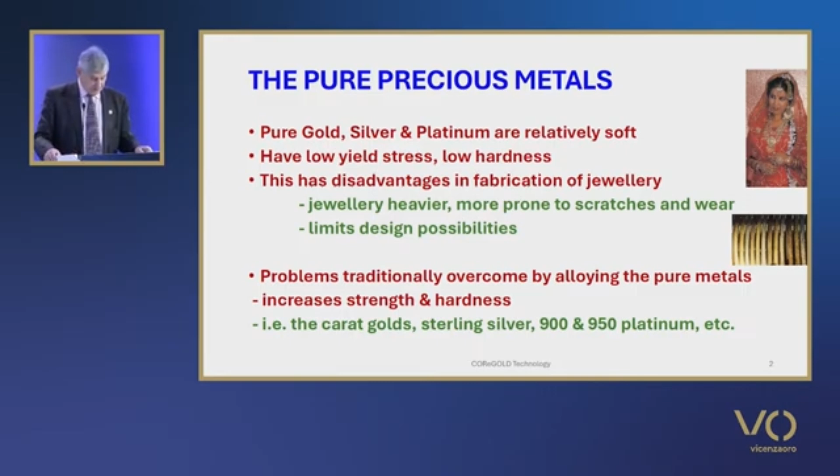However, for gold, especially 24-karat gold of purity greater than 99.0%, is the alloy of choice in the Far East, where it is known as Chuk Kam, meaning pure gold, and in the largest market, India and its subcontinent, 22-karat gold jewellery dominates.

These two markets account for around 40% of total jewellery fabrication, and the relative softness of both 22 and 24-karat gold is seen as a weakness. The development of stronger 22 and 24-karat golds has long been desired.

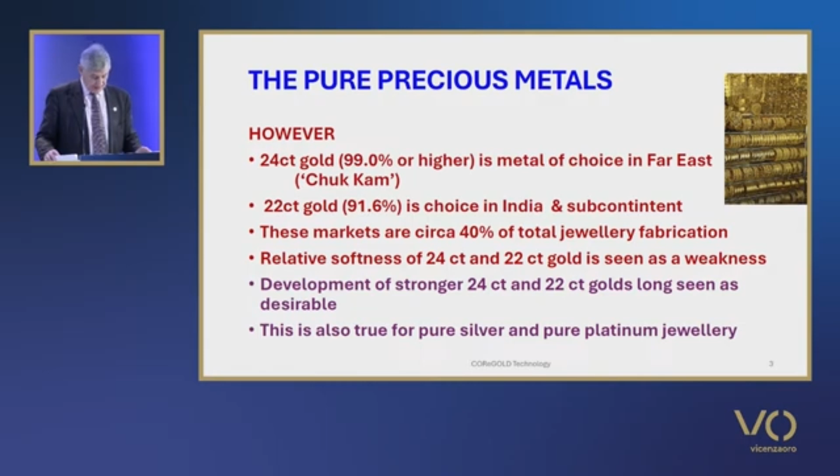For gold, the development of 990 gold, that's a 99% gold, 1% titanium alloy, in the late 1980s, hallmarkable as 24-karat, overcame many of the deficiencies of 24-karat gold with good strength and hardness. But it has not met with much commercial success for several reasons.

In recent years, however, there have been a number of hardened or improved strength 24-karat gold materials developed with finenesses of 99.5% or higher, some in commercial production, where improved hardness and strength have been achieved by micro-alloying, i.e. the addition of very small amounts, typically 0.3%, of certain metals, and these are attaining some limited penetration of the market.

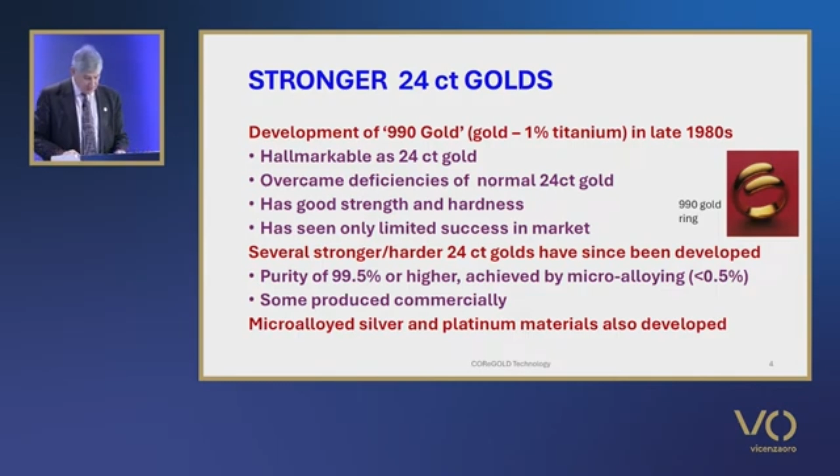Microalloyed silver and platinum materials with increased strength and hardness have also been developed and are being commercialised. Until relatively recently, little information was published on such microalloyed precious metals, and that was mainly in patents, and there was little understanding of the metallurgical basis for such materials.

The work on microalloyed gold was reviewed by myself at the 1999 Santa Fe Symposium and attempted to explain the theoretical basis for the microalloying of gold. Since then, further information has been published and interest in microalloyed silver and platinum has emerged.

Furthermore, interest in hardening high fineness gold, carat golds, has been of interest. This topic was reviewed by the author at the Jewellery Technology Forum in 2005, but more research and information of relevance has since been published. Thus, some 10 years later, it is perhaps an appropriate time to update progress and knowledge.

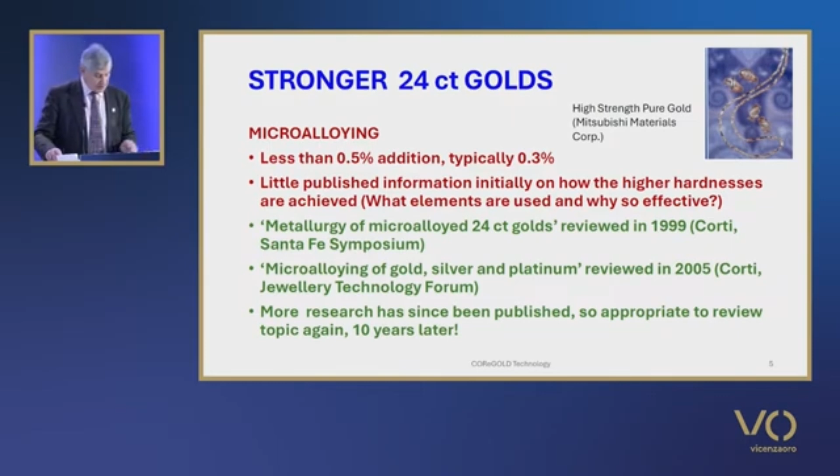This presentation initially focuses on the mechanisms of strengthening metals and then reviews recent developments by conventional alloying of pure precious metals, and then on microalloying of gold, and covers the following aspects.

The microalloyed golds that have been developed in terms of their properties in comparison to those of conventional carat golds. The metallurgy, the theoretical basis for hardening, and possible candidate alloying elements which could form the basis of microalloyed 24 karat golds. And published information on the compositions and practical aspects of jewellery manufacture in actual microalloyed 24 karat golds.

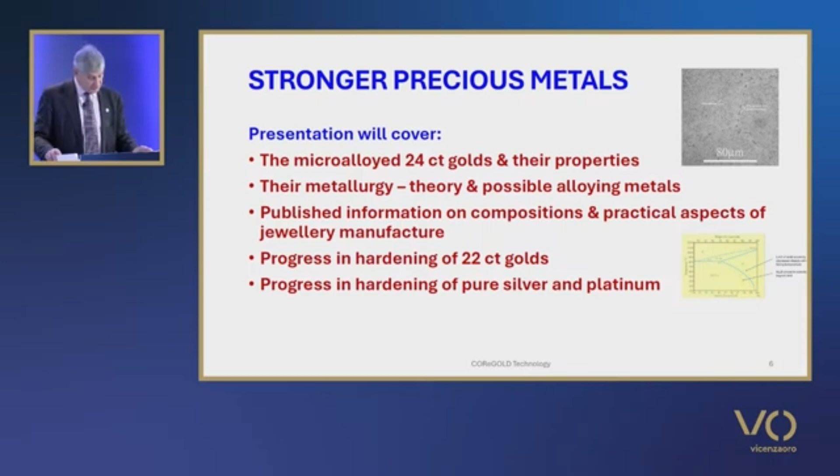Progress in hardening of 22 karat and other high karat golds, as well as platinum and silver, is also discussed. The advantages and disadvantages of such materials for jewellery application are considered.

We look at the mechanisms of strengthening pure metals by alloying, as well as work hardening by deformation. There are essentially three basic mechanisms of strengthening or hardening pure metals through additions of alloying elements: solid solubility hardening, dispersion hardening by second phases, and grain refinement.

Solid solubility hardening: in hardening by solid solubility, alloying additions dissolve in the pure metal. That is, they are incorporated into the crystal lattice of the pure metal, and this results in the distortion of the crystal lattice, making dislocation slip more difficult. That means it requires more force to deform the metal.

The degree of hardening depends on the relative difference in atom size of the pure metal and the alloying metal, as well as the amount that you add. Thus, in carat golds, it is well known that copper is more effective than silver in hardening gold, as its atom is about 13% smaller compared to silver, which is only slightly larger than the gold atom.

In dispersion hardening by second phases, when a second phase is dispersed in the metal, it will cause some hardening. Alloys that form eutectics in their microstructure, such as the silver-copper alloys, are good examples here. However, if the second phase is present as very small particles dispersed within the grains or crystals of the parent phase, these impede the movement of dislocations during deformation and cause considerable hardening.

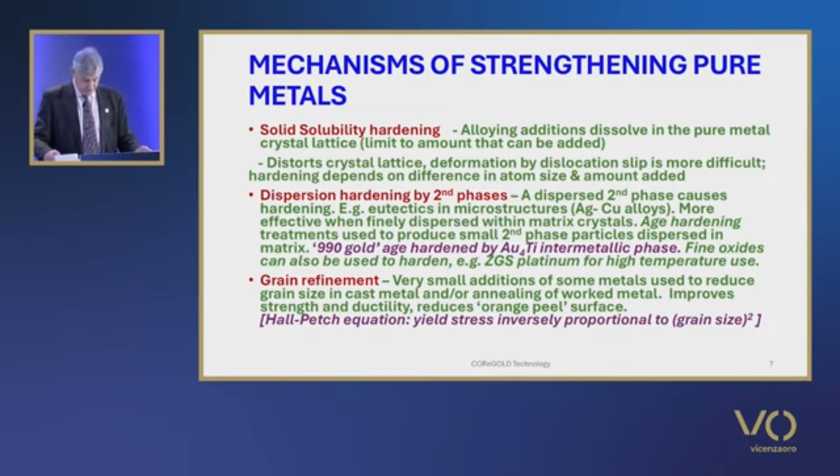If we look at conventional alloying, here we're talking of adding alloying metals in amounts of at least 0.5% or more. The addition of 1% titanium to pure gold to produce 990 gold has been referred to previously. Other significant improvements to 24 and 22 karat golds have been described using conventional alloying approaches.

Du Toit and co-workers at Mintek in South Africa showed that a 995 fineness 24 karat gold containing 0.3% antimony and 0.2% cobalt can be age hardened to a hardness of 132 to 142 Vickers, depending on aging temperature, as shown in the table. And we can argue whether this is conventional or micro alloying. My feeling is it's probably the latter.

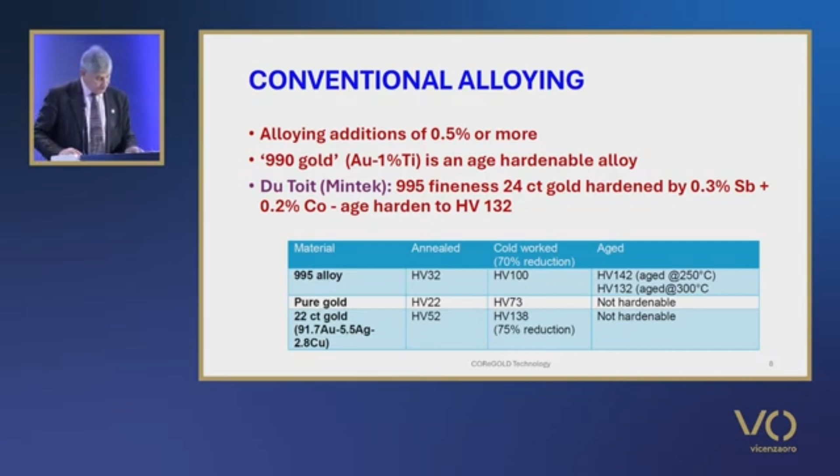Fischer-Bühner, when he was at FEM, has demonstrated the use of circa 2% to 2.5% cobalt additions to effect significant strengthening of 22 karat gold with aged hardnesses of 200 to 260 Vickers, although this involved a relatively high solution annealing temperature of 900 degrees Celsius.

And he also showed that a combination of cobalt and antimony, in total 1%, resulted in a hardness of circa 150 Vickers after aging, but using a lower solution temperature of 700 degrees.

There is also a patent by Taylor, who patented a 0.4% cobalt containing 22 karat gold, silver, copper alloy, but with a small addition of boron included. And this attains a hardness of 134 after 60% cold work. It is not clear what improvement in properties has been achieved over normal 22 karat gold compositions.

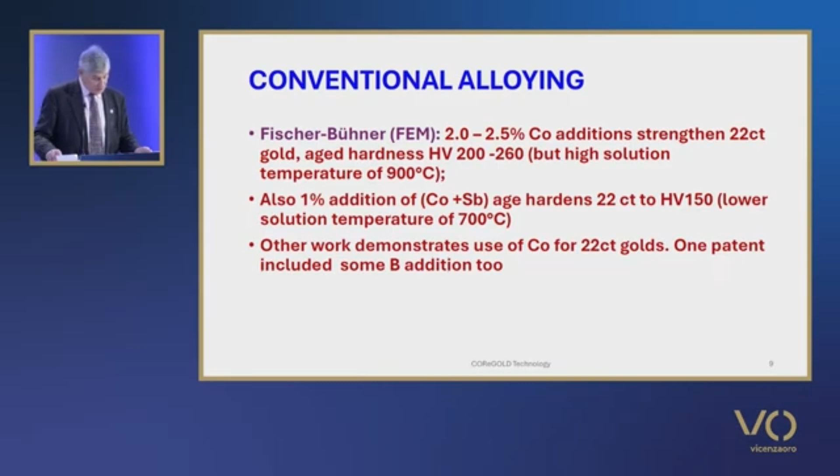We now move to microalloying of gold. I'm going to repeat a lot of what I've said in my earlier review in 2005. But before I start, I just want to say something about the density effect when you're alloying.

We must distinguish between the difference between the atom weight and the atom volume in an alloy. The higher atomic numbered metals are heavier and denser. Gold is a heavy metal with a density of 19.32, where silver has a density of only 10.5 and copper a density of only 8.93.

Thus, in describing alloy compositions, we must differentiate compositions given in terms of weight percent and atomic percent. Weight percent: the relative weights of alloying metals present. And atomic percent: how many atoms there are of each metal in the alloy. This difference is illustrated with gold-copper alloys.

An alloy of 50 atomic percent gold atoms and 50 atomic percent copper atoms, that is 1 gold atom to 1 copper atom, has a weight composition of about 75% gold, 25% copper. And that reflects the difference in the weight of the gold and copper atoms.

We look at the theoretical basis for microalloying. In the development of improved strength 24 karat golds, we're looking at total alloying additions of 0.5% or less, typically 0.3%, and even down to only 0.1% in some instances. This affects a dramatic strengthening of the gold crystal lattice.

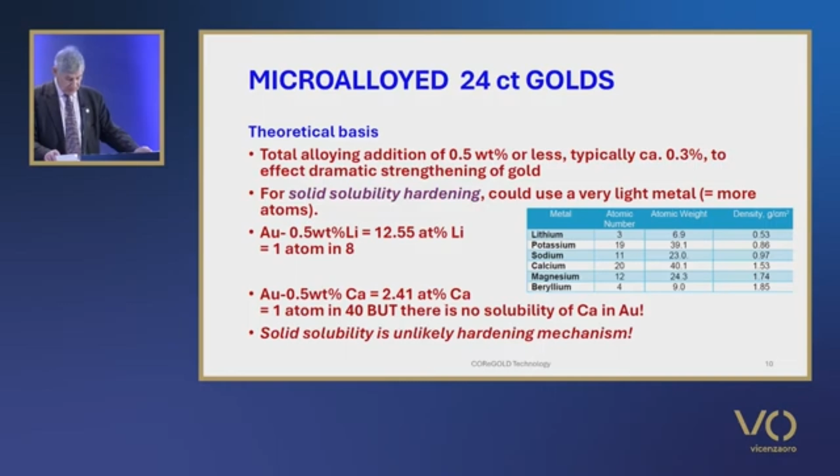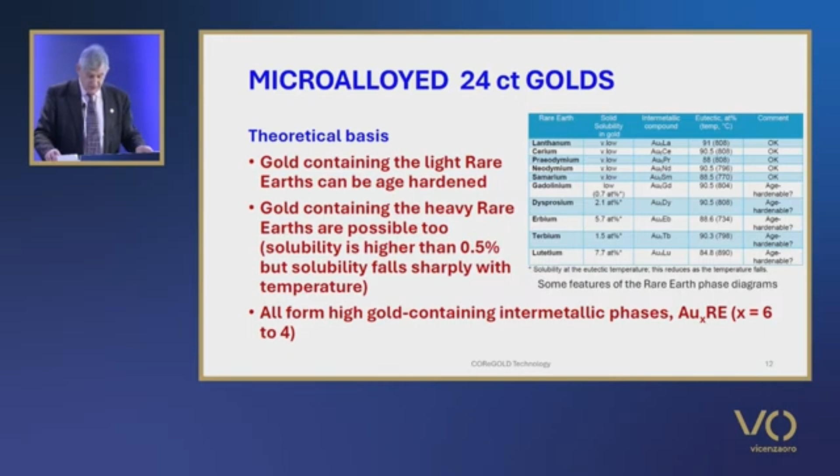Also, as the heavy rare earths have solubility at the eutectic temperature in excess of 0.5%, but a very low solubility as the temperature falls, it is possible that they may be amenable to age-hardening treatment, with the precipitation of fine particles of the intermetallic compounds on annealing quenched material at low temperatures.

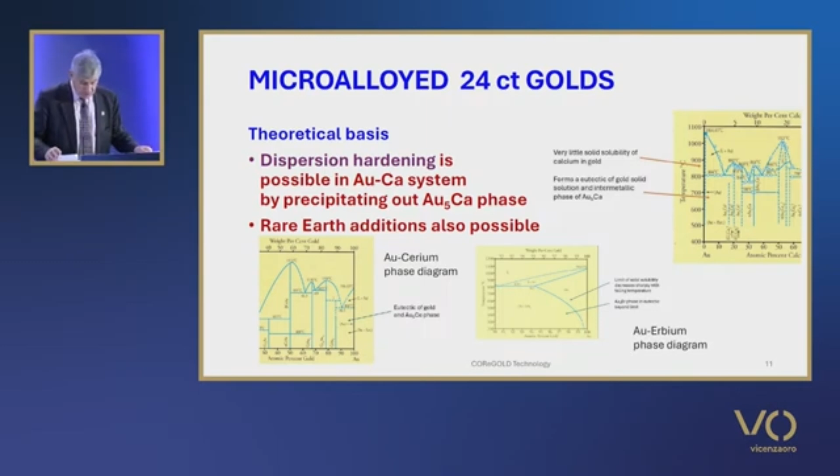And if we just go back again, in the middle there we can see the gold-erbium phase diagram, or the gold-rich end of that, showing the limited solubility as the temperature falls, which suggests that it may be amenable.

However, in that work, a 1% alloying addition was being evaluated. If we consider only a 0.5 weight percent addition of rare earth, then from the solubility data at 400 degrees Celsius, we cannot expect much hardening phase to precipitate on annealing solutionized material at 400. Fortunately for us, Degussa carried out some tests on gold rare earth alloys at alloying levels of 1 weight percent and lower. Cast alloys were annealed at 800 for 1 hour.

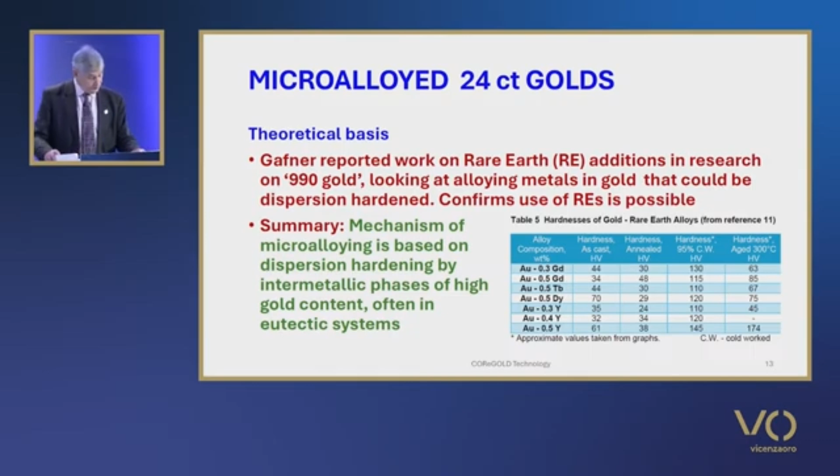From a practical standpoint, as far as published information tells us, these materials cannot simply be remelted and recycled without loss of strength, as the hardening microalloying additions lose their effect on remelting. As we shall see later, this is due to the oxidation of the microalloying metals on melting.

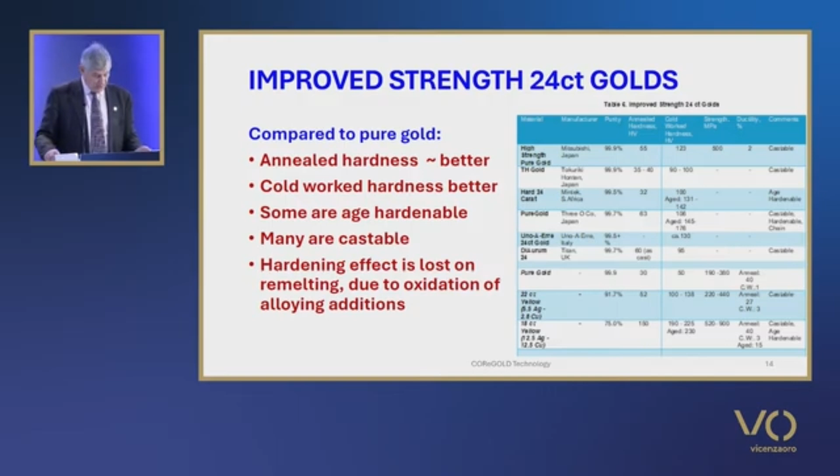The superior strength of these materials has a beneficial effect in manufacturing jewellery, in that certain processes can be done that are difficult with normal 24-karat gold. For example, findings such as lobster claws and some difficult chain designs become feasible. It also allows lighter weight 24-karat gold jewellery to be made, with obvious economic benefit.

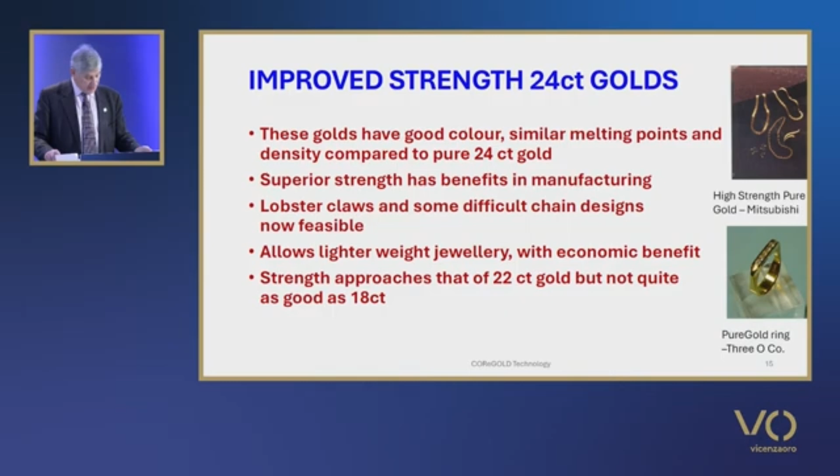When compared to standard yellow carat golds, it can be seen that the improved strength microalloyed 24-karat golds approach the hardness of 22-karat gold in both annealed and cold work conditions, but are still some way behind those of 18-karat gold.

So what are the compositions of these microalloyed golds? The patent literature indicates that the Mitsubishi Materials high-strength pure gold material comprises gold of at least 99.0% purity and 200 to 2,000 parts per million calcium and/or beryllium, germanium or boron, whilst a further patent from Mitsubishi indicates just 500 to 2,000 parts per million calcium plus 1 to 50 parts per million of carbon. Calcium appears to be the main hardening addition.

The 3O Company patent indicates that the pure gold material contains 99.7% gold plus 50 or more parts per million of gadolinium, and optionally 100 to 3,000 parts per million of calcium, aluminium or silicon. In a patent from Tanaka KK in Japan, an alloy for precision casting is claimed containing small amounts of hafnium and the rare earths.

There's also other literature on gold bonding wires for electronics applications that has relevance. In a paper, Lichtenberger and colleagues doped high purity gold of 5 nines purity with 3 to 30 parts per million of aluminium, calcium, copper, silver and/or platinum. They showed that most dopants strengthened the wire during extrusion, and beryllium had the largest effect, but only calcium and beryllium had significant strengthening effects after annealing.

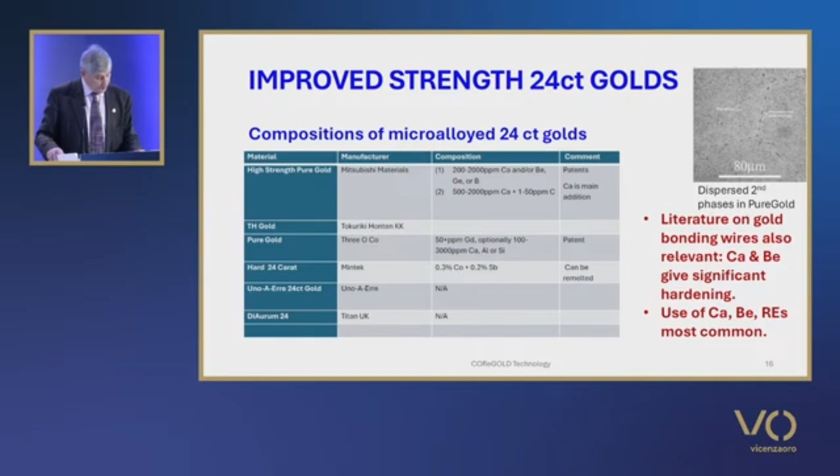We look at more recent literature on microalloy 24 karat golds. Further research has been published since my review in 2005. The effect on properties of rare earth additions such as cerium and gadolinium to pure gold and gold alloys has been reported by Ning. He showed that small additions to both pure gold and gold alloys increase the strength significantly and retard recovery and recrystallization, as well as refining the grain size.

The strengthening of gold is twofold. One, by solid solution strengthening, but Ning notes that the light alkali earth metals such as beryllium and calcium are more effective. Two, precipitation hardening by intermetallic compounds such as gold-6-rare-earth, gold-5-rare-earth, or gold-4-rare-earth. Which one is formed depends on the atomic weight of the rare earth metal. The light rare earth metals are more effective than the heavier ones as they have lower solid solubility and form the higher gold content intermetallic phases.

In a study of a gold 0.13% germanium alloy, Li characterised the cause of brittleness that he found. The gold germanium phase diagram is a eutectic system. He found that germanium tends to segregate to grain boundaries as a eutectic phase, which led to the brittleness.

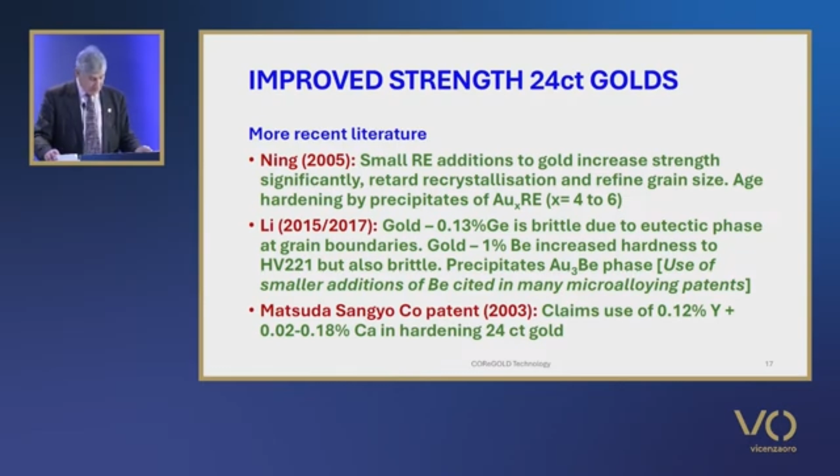This work has relevance to microalloying since the use of smaller additions of beryllium are cited in many of the patents.

The 2003 patent by Matsuda Sangyo claims the use of 0.12% yttrium and 0.02 to 0.18% calcium for hardening of 24 karat gold. Another patent by the University of Tokyo claims a gold-X-rare-earth alloy where X is selected from aluminium, gallium, indium, germanium, silicon and tin, and the rare earth is a rare earth element.

An earlier 2004 patent by Tokuriki Honten claims a harder 24 karat gold containing at least 99.5% gold and 5 to 1,000 parts per million of phosphorus, plus 10 to 1,000 parts per million of one of a group including antimony, copper, zinc, iron, cobalt, nickel, gold, silver and gallium.

A Chinese patent claims a stronger 99.9% gold microalloy containing calcium and a rare earth element plus a grain refiner, while a 2000 patent by Ogasa claims an age-hardenable 24 karat 99.98% gold microalloy containing gadolinium that reaches a hardness of about 150 Vickers after aging.

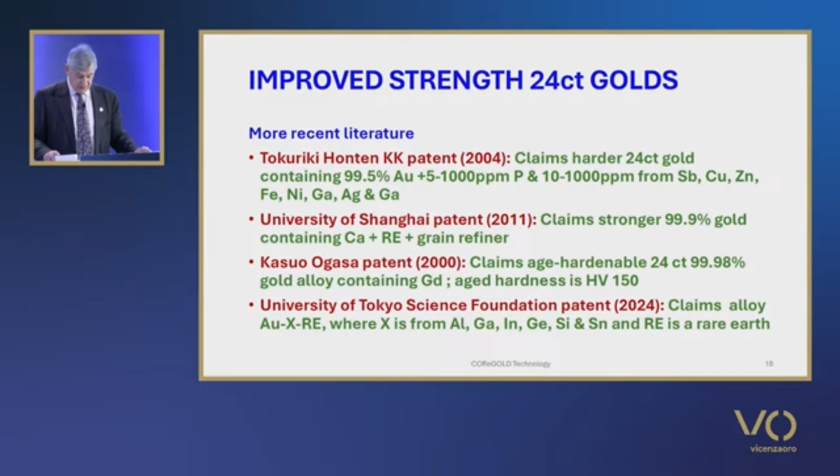In summary, the more recent literature confirms the use of calcium and rare earth additions as preferred microalloying metals, though other additions are possible. It confirms age hardening as the major hardening mechanism, with precipitation of high gold content intermetallic phases within the grains. The picture shows a microstructure of 3O company's pure gold, with some precipitates on grain boundaries and a very fine distribution of the intermetallic hardening phase throughout the internal grains.

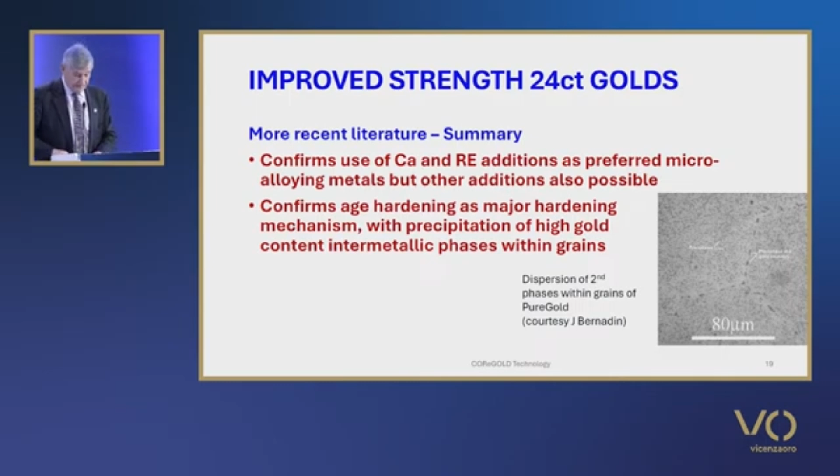I'm now going to move on and talk about improved strength 22 karat gold alloys. As noted in my presentation last year here at JTF on the benefit of titanium alloying additions to precious metals, 22 karat golds also tend to be soft due to the limited amount of alloying element that can be added, which is typically silver and copper.

Fischer-Bühner developed 22-carat gold alloys containing cobalt or a mixture of cobalt and antimony, as I mentioned earlier, to harden 22-carat golds by conventional alloying. These have increased hardness by age-hardening treatments, as discussed earlier. Similar work has been reported by Mintek in South Africa.

In their 2000 paper, they reported on a new hard 22-carat gold alloy, but gave no details of its composition. It has a colour similar to conventional 22-carat gold, but can attain a peak hardness of 274 Vickers in the cold rolled and aged condition.

However, in a later paper in 2003, they describe work on both 99.5% gold and 22-carat gold, that's a gold, copper, silver alloy, in which they study the effects of alloying metals cobalt, germanium, antimony, zirconium and vanadium in hardening them. There they report a maximum hardness of 274 Vickers after cold rolling and aging.

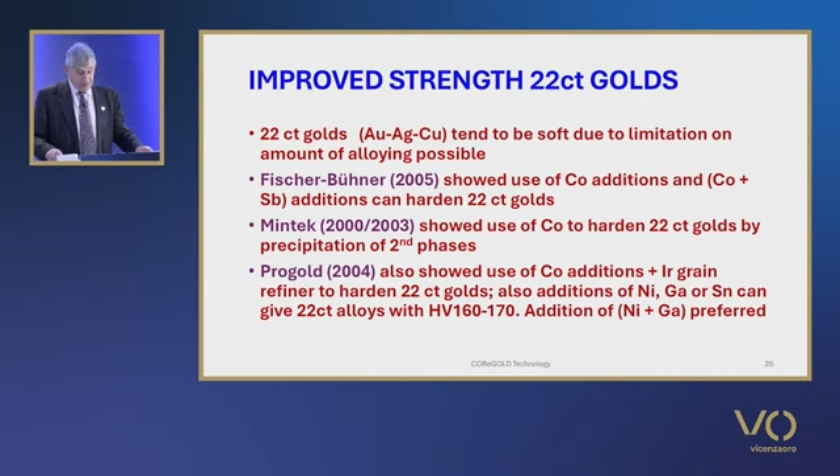The effect of other alloying additions added via master alloys, such as nickel, gallium and tin, gave gold alloys of good colour that could easily attain hardness values of 160 to 170 Vickers, with an addition of nickel plus gallium being preferred.

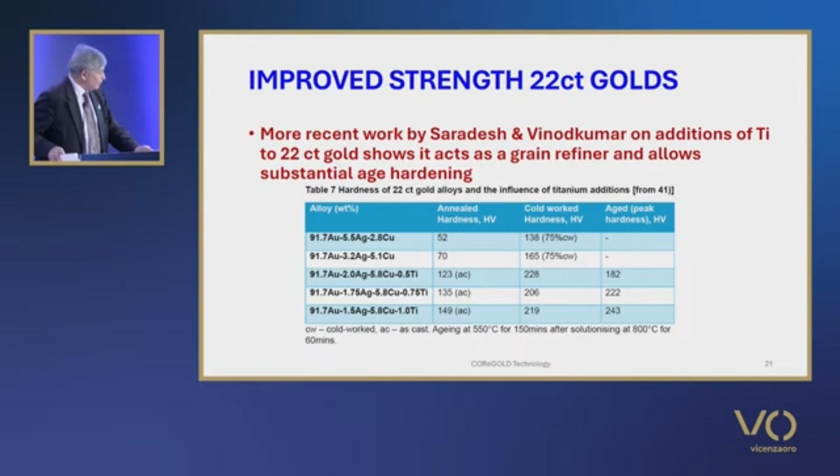Here we can see some results that I'm just going to discuss in the next slide. I showed this last year, so I'm going to move on quickly and just talk about them. So the 22-carat gold alloys I spoke about last year demonstrated that titanium alloy additions act as a grain refiner and allow substantial age hardening. We saw in that table some results.

The commercial use of a 22-carat gold alloy strengthened by titanium, based on this work by the Titan company in India, has allowed jewellery products to be marketed that show a 30% weight reduction compared to conventional 22-carat gold alloys. The figure on the bottom left of the slide shows a hollow bangle in their new alloy, and that on the right shows a solid bangle. My understanding is it's about 0.5 weight% titanium as the alloying addition.

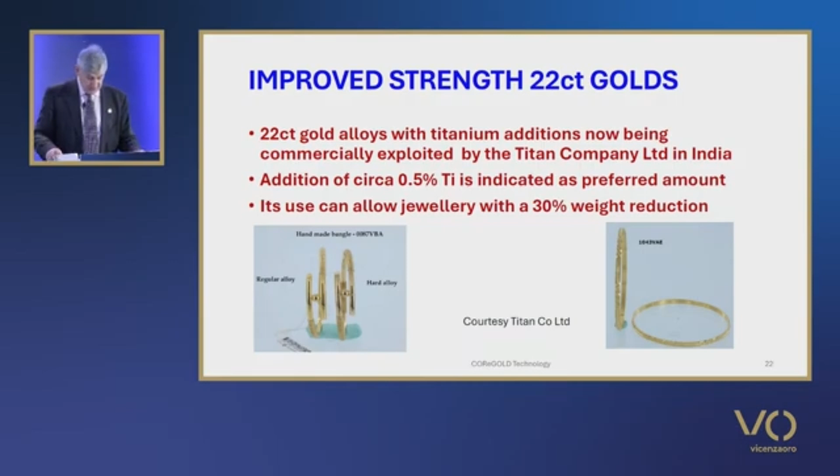Let's just talk about some of the practical aspects of making jewellery in these microalloyed golds. In summary, you can investment cast and fabricate by conventional technologies. You can make some products that are difficult with normal 24-carat gold, as I said earlier, some chain designs, springs, screws, catches and other findings. You can make lightweight, strong chains with good wear properties.

Melting generally needs to be done in an inert atmosphere to prevent oxidation of the microalloying metals. Therefore, they cannot be made easily in a small workshop situation by conventional melting in air. As with normal 24-carat gold, soldering must be consistent with local national laws, and in some countries, use of a lower 22-carat solder is allowed, although there may be limits on the amount of solder used.

However, another factor is the temperature of soldering, which can lead to a loss of work and age hardening in the vicinity of the soldered joint. Laser welding may offer a better solution there. There are also very low melting point 22 karat gold solders, I might like to remind you, and one solder has a melting point of only 361 degrees Celsius. Polishing should be easier than conventional 24 karat golds as they are harder. And Bernardin, in his paper at the Santa Fe Symposium, noted that castings require procedures similar to those for platinum.

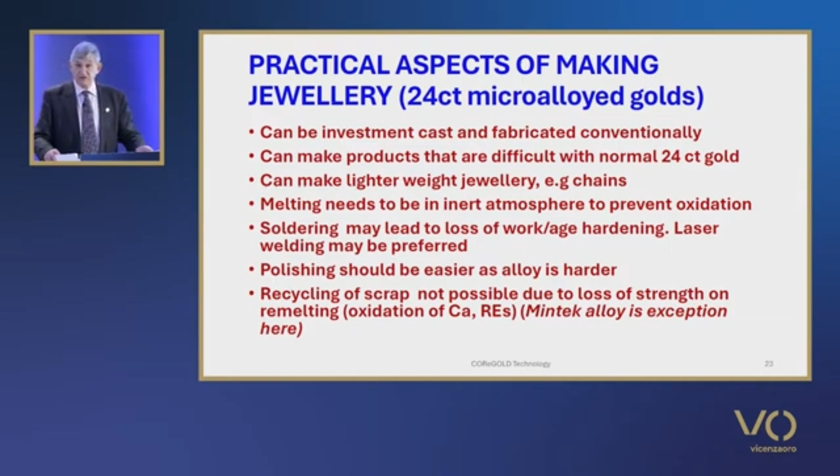Let's move on to the microalloying of silver. In principle, the same approach used for microalloyed gold could be applied to silver. The developer of pure gold also developed pure silver, a 99.3% silver microalloyed material, which is being marketed in the USA. It is claimed to be easy to work as it does not require annealing, is very tarnish resistant, casts well, and is harder than sterling silver.

The patent covers microalloyed gold, silver, palladium, and platinum materials. In the case of silver, an alloy of at least 80% silver is claimed, containing the rare earth gadolinium in the range of 50 to 1,500 parts per million, with optional further additions of alkaline earth metals, silicon, aluminium, and boron in the range of 50 to 15,000 parts per million in total, with hardness values of 130 Vickers or higher and a Young's modulus of not less than 7,000 kilograms per square millimetre.

A further embodiment of the patent claims an alloy of at least 99.45% silver with 50 to 5,000 parts per million of gadolinium, plus further optional additions of the same metals. Hardness values of at least 120 Vickers and a Young's modulus of 7,000 kilograms per millimetre squared are claimed, with hardness rising to at least 140 with 50% cold work. These materials are claimed to be heat treatable. The use of gadolinium is claimed to be the most effective hardening element and results in a high Young's modulus. These small additions do not affect the colour.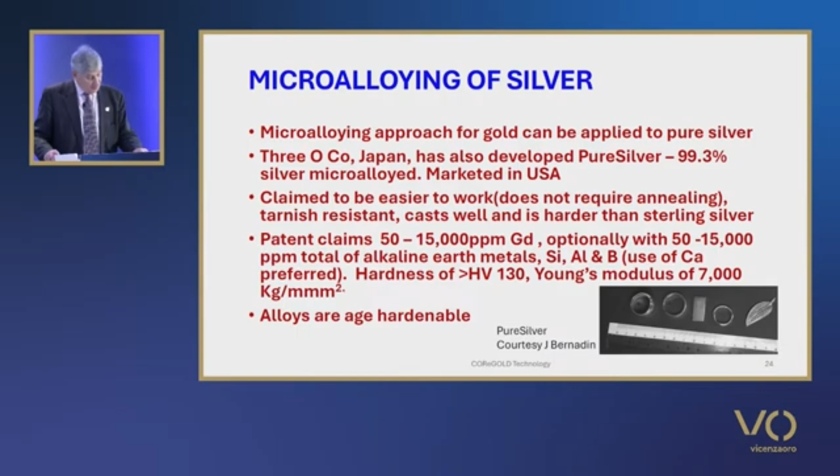And lastly, let's talk about microalloying of platinum. Microalloying of platinum should be possible. Of course, oxide dispersion strengthened platinum, as I mentioned earlier, for industrial applications has been on the market for many years. In a patent from Japan, a hard, high-purity platinum alloy containing 10 to 100 parts per million of cerium is claimed that has good hardness, luster and tarnish resistance, suitable for jewellery manufacture, and is at least 99% purity. Vacuum or inert gas is required during melting to prevent loss of cerium by oxidation.

A platinum cerium phase diagram shows characteristics similar to that of the gold cerium system. For cerium contents of 0.03 to 0.3%, hardness values of 61 to 102 were obtained compared to 40 Vickers for pure platinum, and hardnesses of 120 to 136 for 950 fineness platinum alloys. A commercial alloy, UHP platinum from Japan, appears to be a microalloyed platinum at 999.5 fineness, but little information is available.

The Ogasa patent that I mentioned earlier also includes platinum materials, and this claims platinum alloys of at least 85% platinum containing gadolinium and the other optional elements listed above for silver, preferably calcium, in the range 50 to 15,000 parts per million in total. Cast hardness values of at least 120 Vickers and Young's modulus of not less than 8,000 kilograms per square millimetre are claimed. With 50% cold work, hardnesses of at least 150 are claimed.

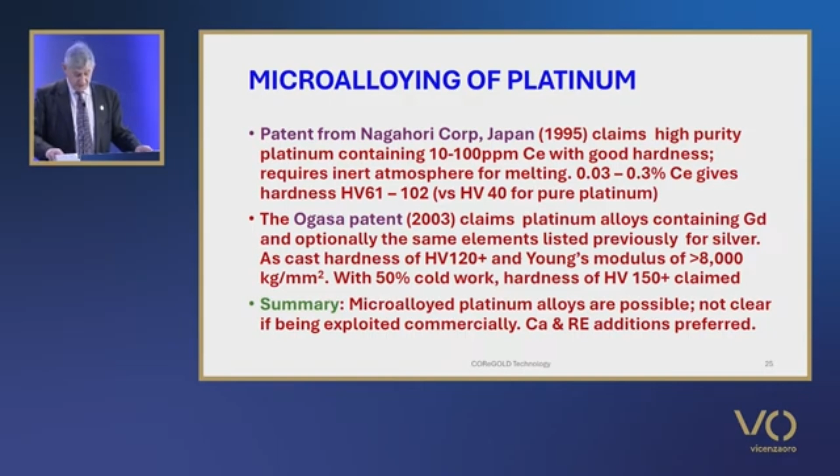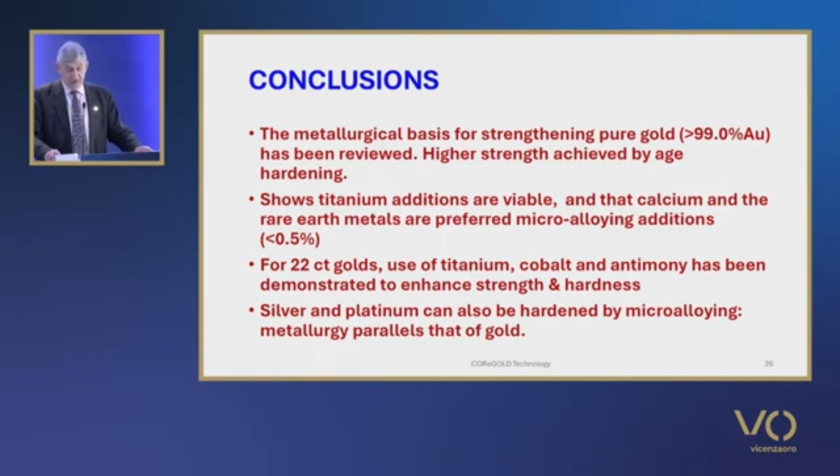So we can come to my last slide. I think we can conclude that the metallurgical basis for strengthening and hardening 24-karat gold of at least 990 fineness has been reviewed. This shows that as well as titanium additions, calcium and the rare earths are the preferred microalloying additions, but other possibilities have been noted. Commercial alloys are available and jewellery is being made in these alloys. The advantages and pitfalls of such alloys for jewellery production have been summarised. The extension of this approach to hardening of 22-karat golds has also been reviewed, where the use of titanium, cobalt and antimony are the preferred additions, mostly as microalloying additions. Hardening of silver and platinum by microalloying has also been reviewed, and their metallurgy parallels that of gold. The silver materials are known to be commercially available in the USA.